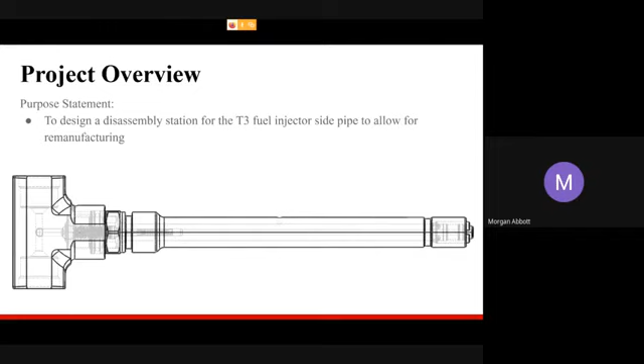The purpose statement was to design a disassembly station for the Tier 3 fuel injector side pipe to allow for remanufacturing of the assembly. Pictured is a full assembly of what we were challenged to disassemble.

The scoping statement objective was to design a disassembly station for the General Electric Tier 3 side pipes while maintaining Bosch safety standards. They gave us a budget of $20,000.

From the side pipe assembly, we had to recover the outer sleeve, the high pressured shaft, the T-piece, and the left-hand nut.

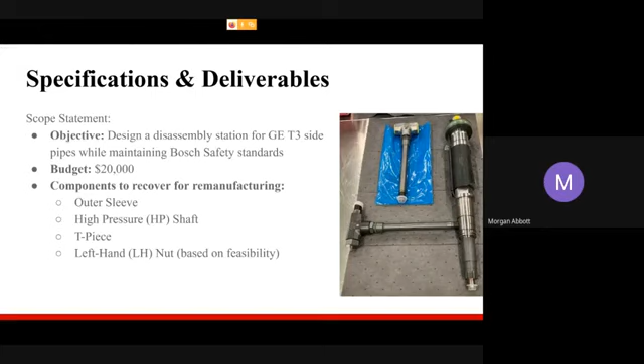The design must be capable of removing the left-hand nut, assist in the O-ring removal, pull apart the outer sleeve from the T-piece, unthread the T-piece and high-pressured shaft from one another, and be able to disassemble the side pipe at any state of partial disassembly and continue in the process.

Below is a disassembled picture of the side pipe assembly, along with the parts that we needed to keep. Our scrap pieces are shown, which include the ball and spring and O-rings.

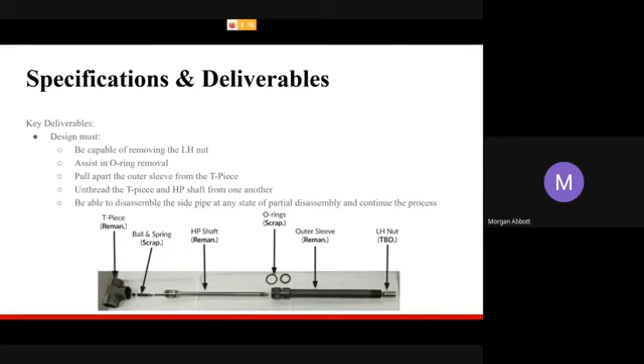For the selected concept for removing the left-hand nut, we decided to use an impact driver. The requirements for this impact driver is that it needs to supply a 90 Newton meter torque. It cannot apply an excessive torque on the user and can only rotate in one direction.

The negative of this is that battery charging is required. However, the positive is that it's small, it's cheap, it's easy to learn and use, it's easy to get off the shelf, and it's used at many stations already.

In order to remove the O-rings, we decided to go with a V-shaped tool in order to push down with the outer sleeve and push that O-ring up, making space for that cutting tool to cut through that O-ring and remove it.

The downside of this is that there's pressure required from the operator, but the positive is that you can use it for both O-rings, and there's an ergonomic advantage for the operator.

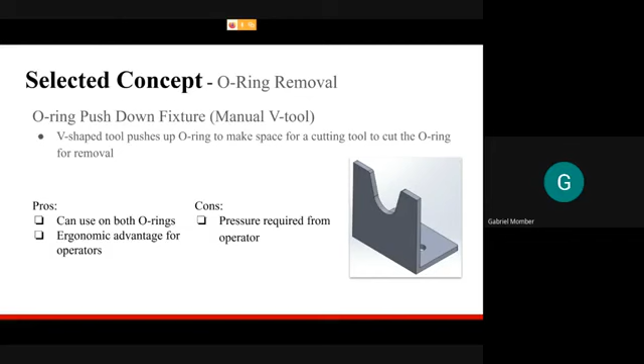In order to remove the outer sleeve, we decided to go with a U-tool with a pneumatic cylinder. We would need to supply an estimated 180 newtons, or 40 pounds of force, in order to remove that O-ring press fit, and it must engage with two-hand operation.

The benefit of this is that it's cheap, it's clean, and it's easy to get off the shelf. However, it increases the space requirements as well as requires a two-hand safety feature.

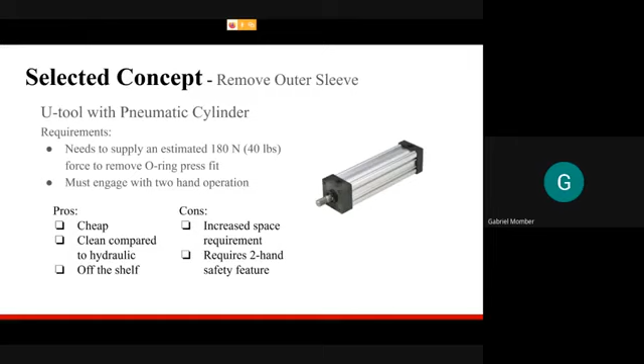In order to remove the T-piece from the inner shaft, we decided to go with an electric motor. The requirements for this is a 615 Newton meter torque. It needs to be ergonomic and it must be robust.

The downside of this is that it increases the cost and requires two-hand safety. However, it is powerful, repeatable, it's easy on the operator, and it's quiet as well as easy to power.

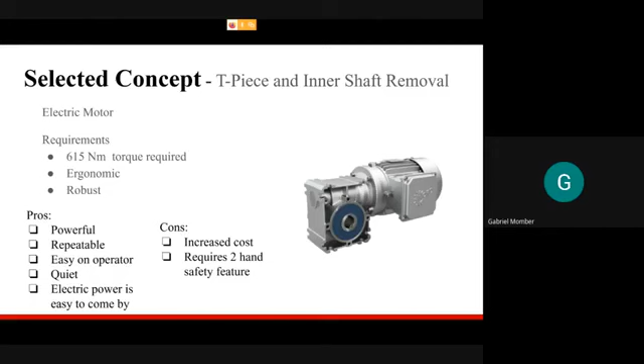For the overall selected concept, we created a CAD representation, which you can see on the right of this slide. The first step would be to remove the O-ring, which we would do with a push down and cut manual fixture, then left-hand nut removal using an electric impact driver, and removal of the outer sleeve done via a pneumatic cylinder.

Then separation of the T-piece and the high-pressure shaft, which would be done with an electric motor. The advantages of this is that it simplifies the operator's actions, it minimizes the force required from the operator, and it reduces the overall cost.

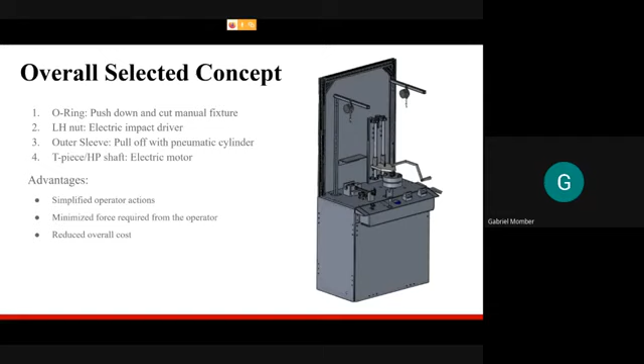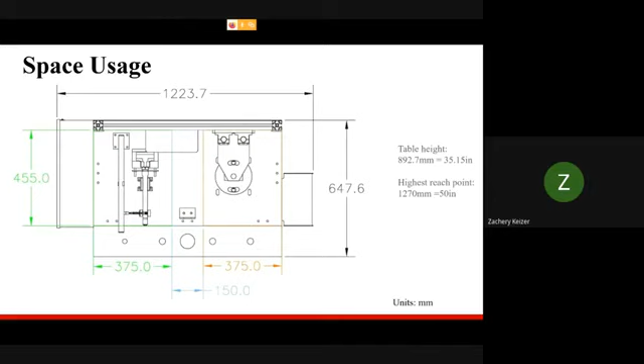Then we have the V tool to remove the O-rings, which is about 150 millimeters wide. And the orange box shows the high pressure shaft removal station, which is 375 millimeters wide as well.

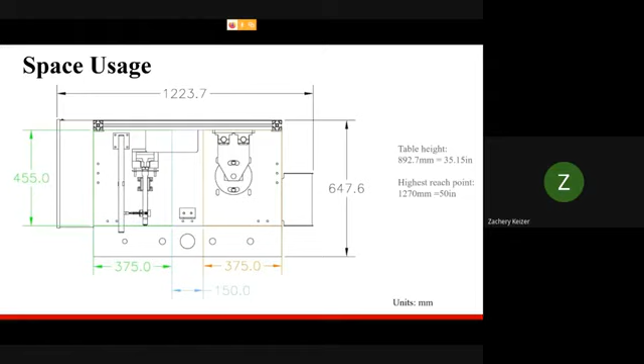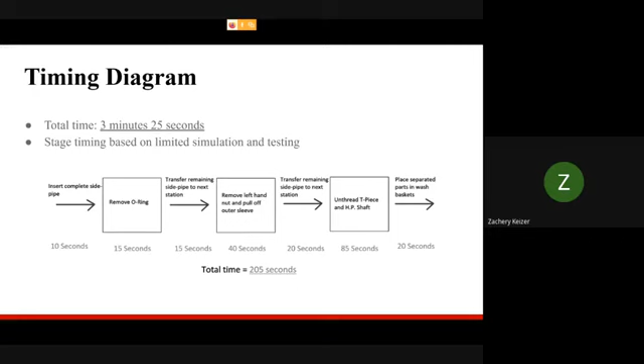As previously talked about, going a little more in depth on our process chosen to remove the O-ring, we created a 7-gauge hot rolled steel V-shaped tool, as we call it.

This is nice because it does allow for the removal of both O-rings, even though they are different diameters. Pushing down into this allows for cutting of both O-rings.

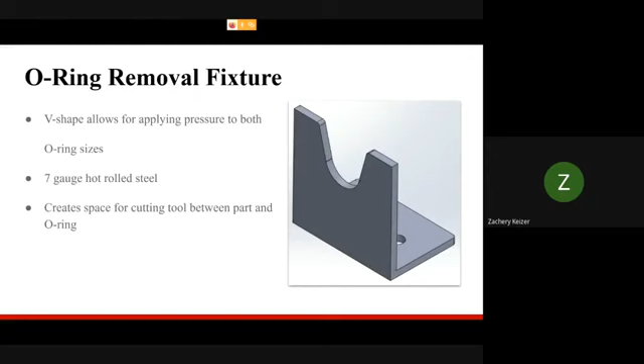Moving on to our outer sleeve removal station, we are using a pneumatic cylinder as well as two-action air directional control valve to remove the outer sleeve from the T-piece. This is done after the impact wrench is used to remove the left-handed nut. All this is held down with a spring-loaded pin to keep it from moving while the operator is doing so.

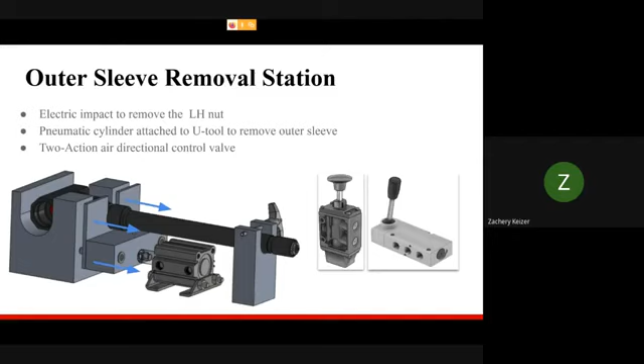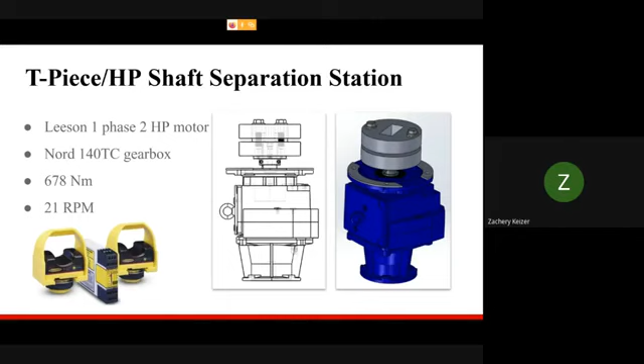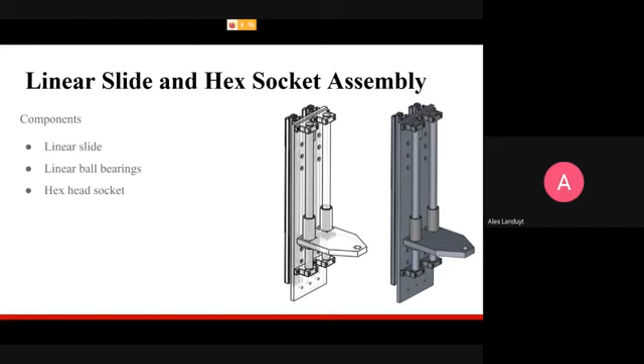In order for all of our electric components to be wired correctly, we came up with a wiring diagram. We selected for the system to be run on 110 volt VAC, and that will also have additional outlets for plugs that will allow the users to gain additional access to power down the road if there are changes or updates that need to be made to the system.

We also implemented, like Zach had mentioned, a 2-hand safety system, and this will run on 24 volt DC. This allows the system to be completely safe and removes the operator from the potential of being shocked by 110 volts if something was to go terribly wrong.

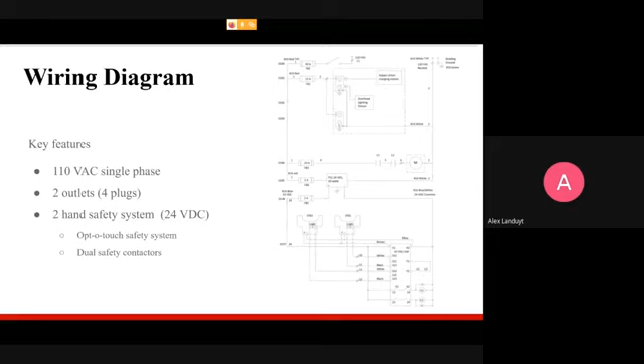The wiring diagram on the right has all of our major components listed, as you can see there. We also have our gauge of wire listed and any fuses that would be required, giving a complete picture to any type of electrical questions that may need to be answered down the road.

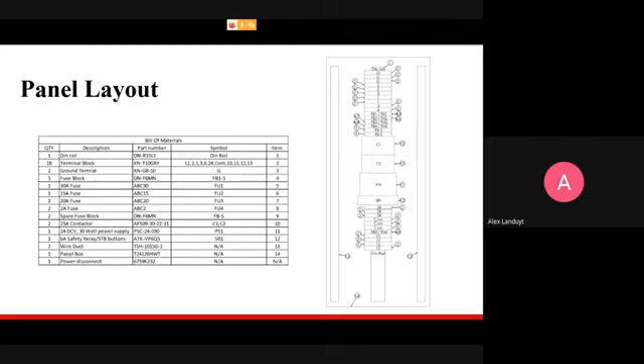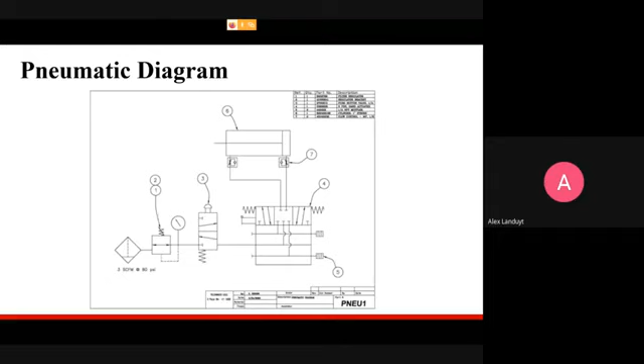So this is laid out here, obviously using pneumatics, which makes it easy and safe for the operator, as well as this drawing gives us an opportunity to make sure everything is in working order, and if something was to go wrong, parts can easily be replaced down the road.

This project had a number of design challenges associated with it. The tool used in removing the outer sleeve was made of 4mm sheet metal and needed to be studied in order to ensure that the tool would not distort. The hex socket plate also needed to withstand the force needed to separate the T-piece from the high-pressure shaft. Both of these parts required complex FEA analysis.

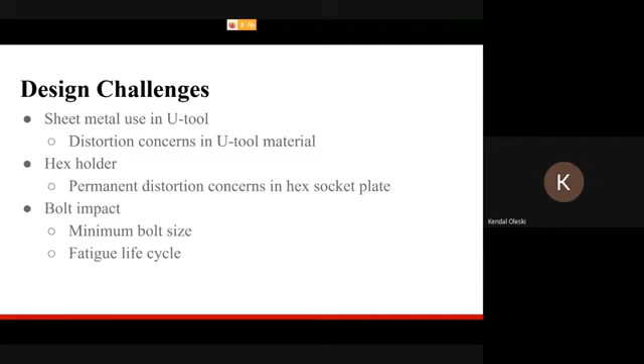The bolts used in removing the T-piece also would experience an impact force. Calculations for the minimum bolt size and the fatigue life cycle were performed in order to ensure that the design was adequate. Here we have the U-tool analysis.

After constraining the tool to mimic the real-life force application, the maximum stress was found to be 13.62 megapascals, with a factor of safety of 13.

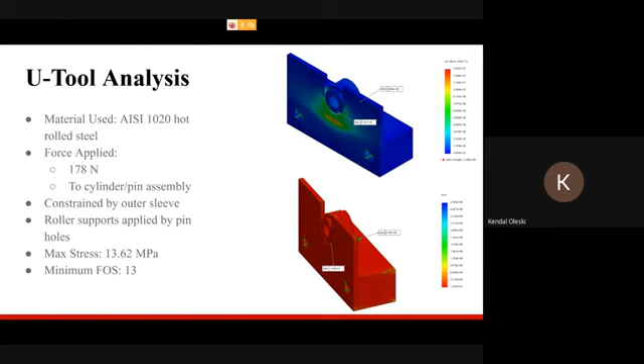The maximum stress and minimum factor of safety were studied for the hex socket as well. A maximum stress of 6.34 megapascals was found, with a minimum factor of safety of 55.

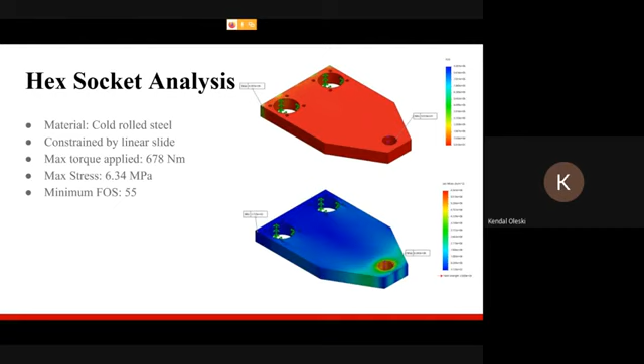Bolt impact analysis was performed using the worst-case scenario for each variable. A grade 10.9, 12mm bolt was used based on the minimum bolt size calculations, and fatigue life cycle calculations determined that even with all variables assumed to be at their worst case, the bolts could be expected to last over 47,000 cycles.

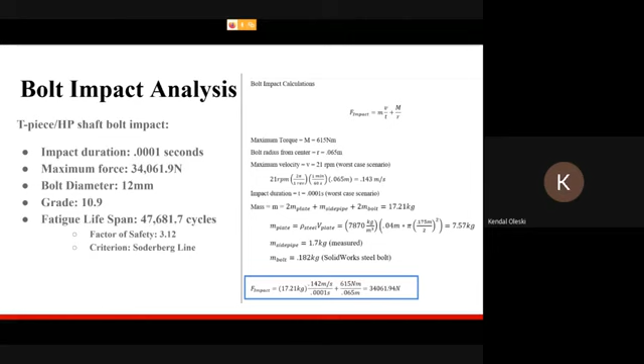After project design was completed, the specifications were met for the disassembly station, and the design was approved by Bosch for future implementation. Due to current circumstances, the originally planned build of the station could not be performed. Additional consulting was performed for further process improvement in place of performing the build.